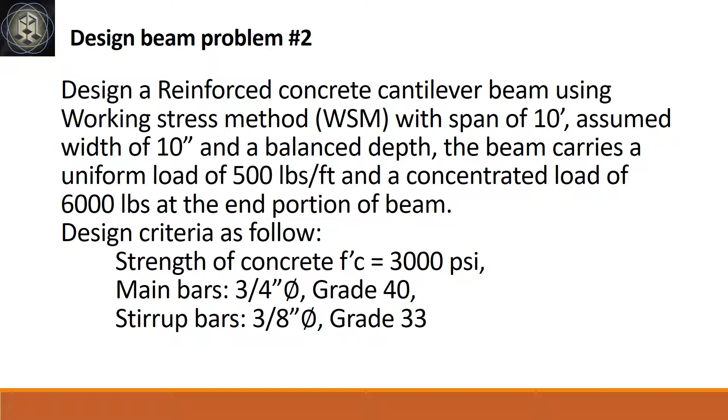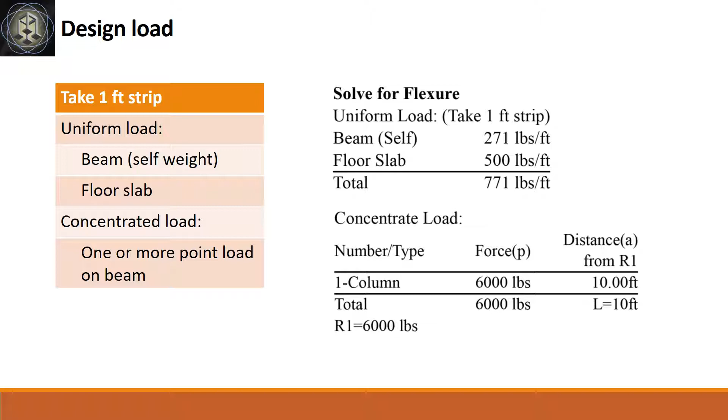Design criteria as follows. Strength of concrete 3000 psi. Main bars 3/4 inch diameter bar grade 40. Stirrup bars 3/8 inch diameter bar grade 33. The beam carries a uniform load of 500 pounds per foot. We assume the self-weight of beam to be 271 pounds per foot, giving us a total uniform load of 771 pounds per foot. It also carries a 6,000 pounds concentrated load at the end tip of the beam.

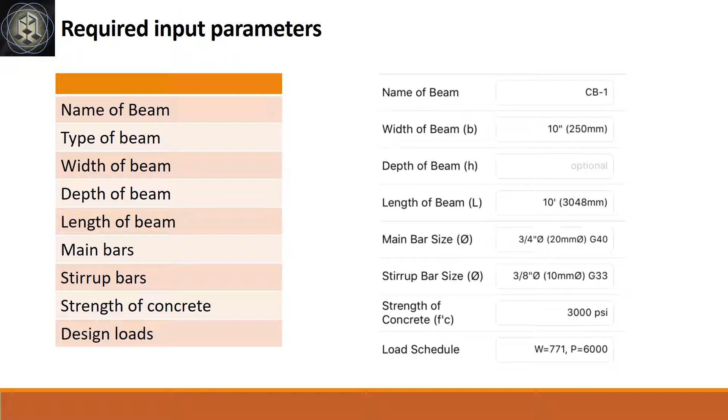Enumerate input parameters in our design problem. CB1 for name of beam, 10 inches for width of beam, depth of beam unknown, length of beam 10 feet, main bars 3/4 inch diameter grade 40, stirrup bars 3/8 inch diameter grade 33, strength of concrete 3000 psi, total uniform load of 771 pounds per foot, and 6,000 pounds concentrated load.

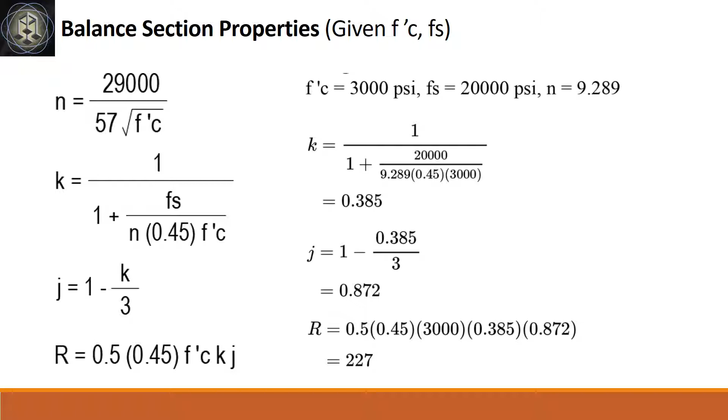Solve the balanced section properties given f'c equals 3000 psi, fs equals 20,000 psi. We get n equals 9.289, k equals 0.385, j equals 0.872, and R equals 227.

Proceed to solve for flexure and depth of beam. The moment from uniform load is 462,600 inch-pounds, while the moment from concentrated load is 720,000 inch-pounds. That gives us a total moment of 1,182,600 inch-pounds. The effective depth is 22.82 inches, and the total beam depth is 25.32 inches. Round up to 26 inches.

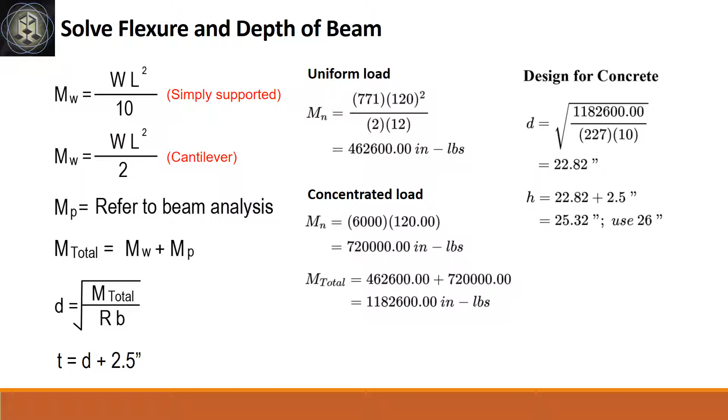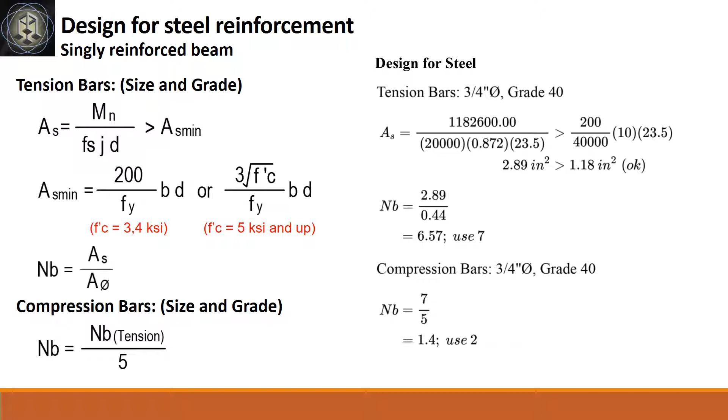Solve the area of steel given M equals 1,182,600, fs equals 20,000, j equals 0.872, and d equals 23.5. We get 2.89 square inches. The number of tension bars from a 3/4 inch diameter bar is 7. The number of compression bars is 2.

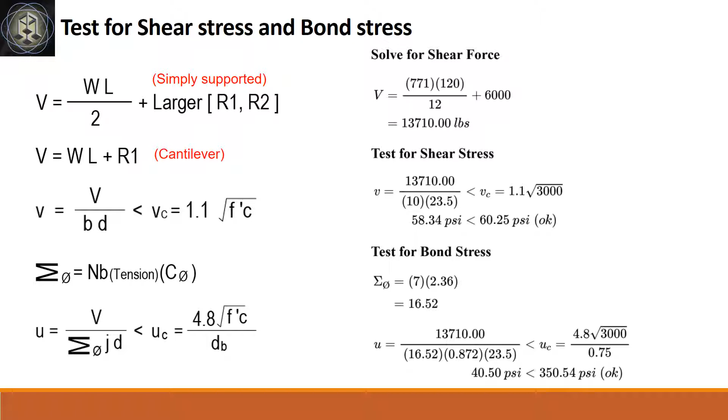To test shear stress and bond stress, first solve for shear force, which equals 13,710 pounds. Shear stress equals 58.34 psi, less than 60.25 psi concrete capacity. For bond stress, the total circumference of bars is 16.52. Bond stress is equal to 40.50 psi, less than 350.54 psi concrete capacity.

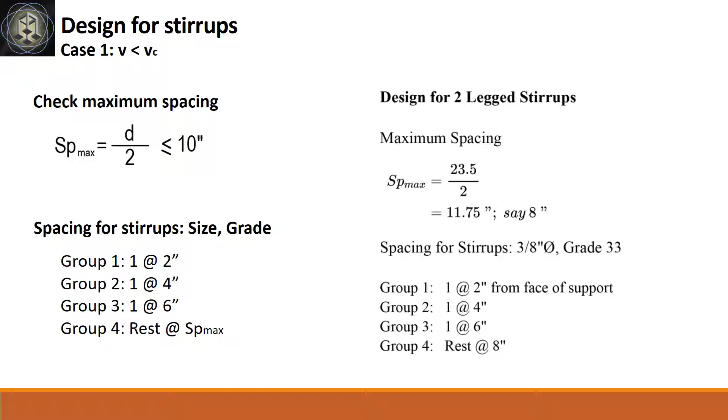Since the shear stress is less than the concrete capacity, we proceed to maximum spacing of 8 inches. Our final stirrup spacing is 1 at 2 inches, 1 at 4 inches, 1 at 6 inches, rest at 8 inches. For 3/4 inch diameter main bars, use half-inch diameter stiffener bars.

The design results for our problem are as follows. f'c equals 3000 psi. fs equals 20,000 psi. Beam size at 10 inches by 26 inches by 10 feet. Main bars at grade 40. At support, top bars 7 pieces 3/4 inch diameter bar. Stiffener bars 2 pieces half-inch diameter bars. Bottom bars 2 pieces 3/4 inch diameter bar.

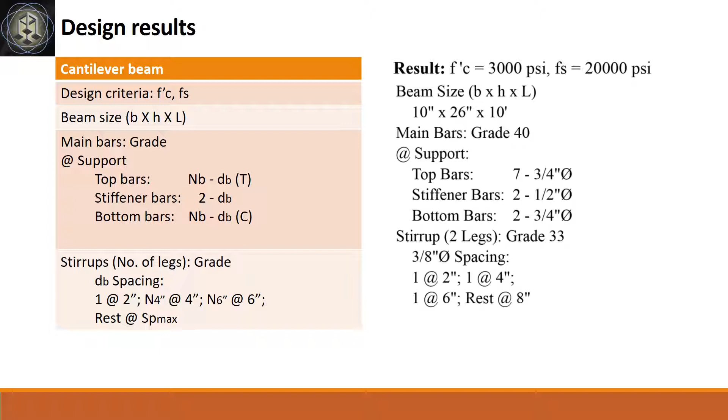Stirrup of 2 legs at grade 33, 3/8 inch diameter bar, spacing 1 at 2 inches, 1 at 4 inches, one at 6 inches, rest at 8 inches.